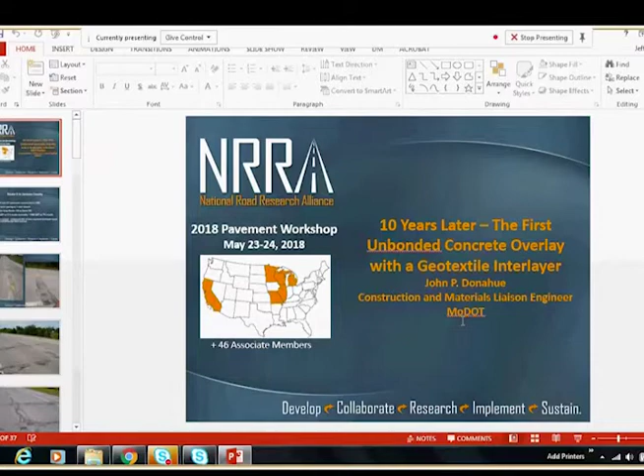John was born ready. All right, very good. We'll just switch the order up then.

Next presenter is John Donahue with Missouri DOT. John is a fellow Illini, but he fled Illinois many years ago and never came back, so he's happy there in Missouri, I guess. His presentation is the 10-year anniversary of the Route D Unbonded Concrete Overlay, oldest U.S. project with Geotextile Interlayer. And I'll comment that we built the 6x6 design on Geotextile just a few years ago in Illinois, sort of based on the success in Missouri. So I'm interested to hear John's presentation.

Okay, Chuck. Is there a clicker to advance, or do I just use this laptop? Okay, that's fine. All righty.

This will be a pretty simple, straightforward presentation. In fact, I did it specifically just for this because Tom was looking for topics, and I thought, what could I do? And I thought, hey, Route D, it's 10 years. Let's do a 10-year anniversary update on it. I just had a few of our technicians go out a couple weeks ago and do survey on it, so this is hot off the press type information.

But anyway, I'll just give you a little background information of why this project was significant. This was what we call a letter route, but letter routes are typically pretty low volume. This was actually a concrete pavement constructed south of Kansas City, kind of a bedroom community type portal, but there was some truck traffic, so it wasn't insignificant in terms of the type of loadings that it experienced.

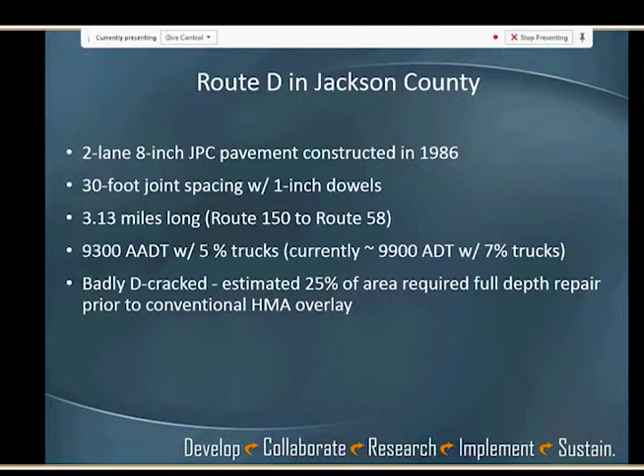I want these pictures to kind of soak in with you a little bit. Some of these you'd have to take a running start to get from one slab to the other. We had a joint presentation years ago with Kansas, and the people from Kansas were like, "We can't believe you guys even had this road open to traffic." So when we toyed with the idea of doing a concrete or specifically big block overlay, I was a little skeptical. I thought that we were really challenging it with the condition of the pavement. There's another one.

You may or may not be familiar with this, but we are big on doing alternate pavement designs. In this case, we actually let the contractor select either a 5-inch concrete overlay or basically a 5 3/4-inch asphalt overlay, which would have been the typical treatment for this. I have to say, though, it was somewhat hardwired. We had a pretty large local contractor in Kansas City that was kind of eager to do this. So we knew with the setup we had that it was probably going to go concrete, so we were pretty optimistic.

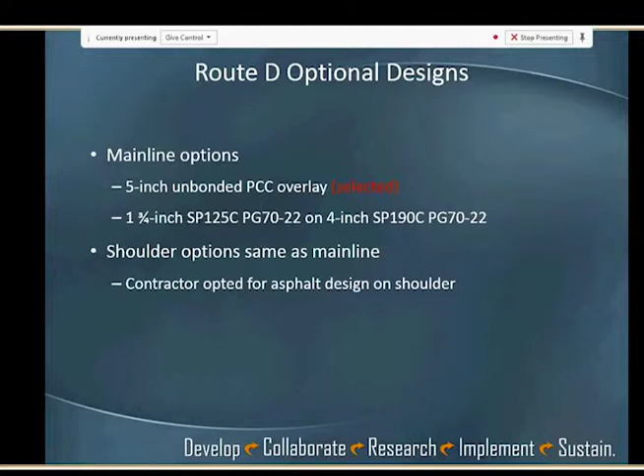And on the shoulders, we'd also given the option of going with either concrete or asphalt. This was the first one of ours. Manik mentioned a slide from our experience with the 4x4 bonded concrete overlays. This was technically one of our first, or really our first significant, what we call big block unbonded overlay.

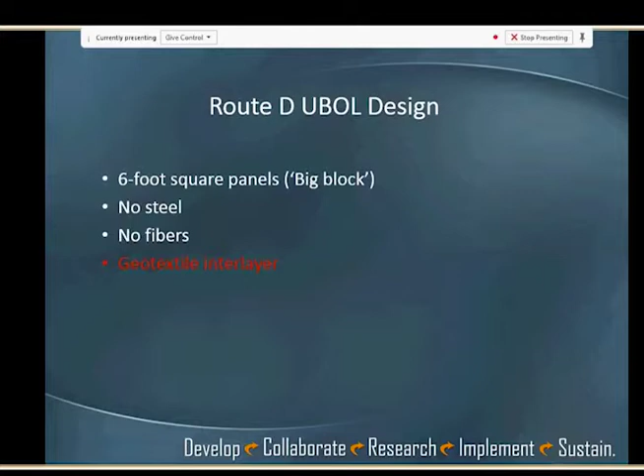And so we're not going to incorporate steel or fibers, but the real significant aspect of this is we were going to try using a geotextile for the interlayer instead of the conventional asphalt interlayer that we've been doing up to that point. Now, just to rehash, and a lot of you know this already, but we'll go over it.

The purpose of the interlayer, and this is an idea that was adopted from Germany, and actually, in a way, you could say this project was not only the first in the country, but maybe the first in the world, because the way the Germans used it, they used it as a separator layer on cement-treated bases. So they weren't even applying this between two concrete pavements. I guess that's a fine point to argue.

The advantages of using this type of geotextile, which was not your Sam's Club weed control fabric, there's a little more to it, was obviously providing the separation that an interlayer should for an unbonded overlay. Also to actually provide drainage. I was kind of skeptical of this, although from some of the data that Minnesota did, it bore out that you really do get some transmissivity of moisture, and you can pull it away from the pavement out towards the shoulder. So there are some specifications for that.

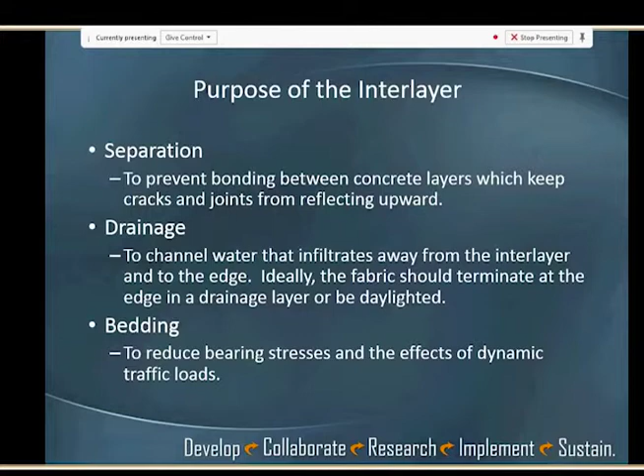And also, because of the thickness of it, probably to some degree mitigating or dissipating some of the horizontal, or possibly even vertical strains from coming up through the overlay. This was the specifications, and we were working with the Transtec Group, George Chang, who you've heard already, works for them, but specifically Sabrina Garber, who speaks and can write German, so she actually translated the German specifications into English, so this was her version of it.

And you can see there is an emphasis on the things you would expect with the fabric, such as tensile strength and elongation, but also you have those spec conditions for the water permeability under different pressures and a few other things as well. And also the weight. At the time, the recommendation was in metric, weight per area, but we converted it to ounces. So in terms of ounces, it was somewhere between 13 and 16 ounces per yard. I think this particular fabric that we had was somewhere in the 15 range.

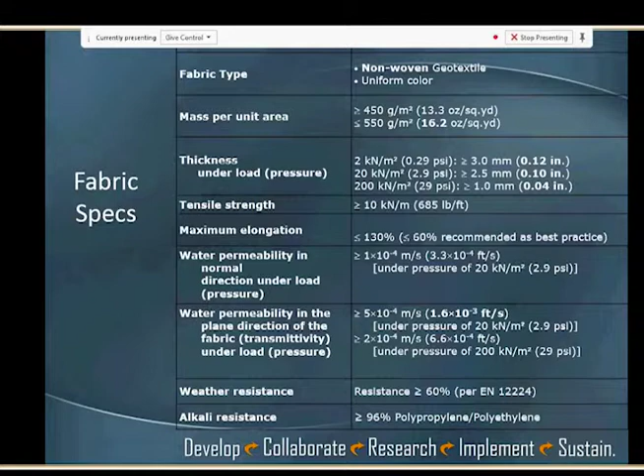And I haven't really followed this closely the last 3 years, but I thought the recommended weights have inched up closer to maybe 20 ounces. I don't know if that's true or not. I thought I'd heard that they're a little bit heftier, but that's what we had at the time. Now, you could see based on the prior condition that we probably needed to do a little bit of prep work to the existing pavement.

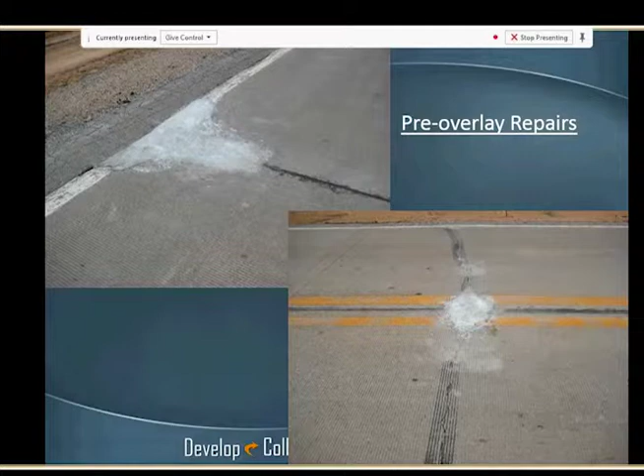We weren't picky. We actually allowed the contractor to use virtually any material. Even if they wanted to use an unbound material, we would have allowed it just so they could have a flush surface to place the fabric on. In this case, the contractor elected to use a grout slurry, which I would suspect was fairly low strength. So while it's better than an unbound material, it's not exactly a permanent fix. So the gist is that we didn't really improve the existing pavement a whole lot. We were just trying to get a flat surface.

And these are some shots from the construction itself. This was new to this contractor, obviously, because we hadn't done this before. I think the standard roll sizes were either about 14 or 15 feet. I don't know if they've shortened those roll lengths, but we basically had some overlap on the center line, and then on the outside shoulder, we pulled that fabric out maybe a couple feet. So that's really where it ended.

And then they put an asphalt shoulder on there. So we didn't really try draining it all the way out to the edge of the shoulder, which probably would have been a better idea, but we just weren't going to invest the money in that much additional fabric.

And some of the conditions to try to look for, obviously, is avoiding wrinkles, cleaning the surface prior to placement, overlapping it, try to overlap it by not more than 8 inches, and then avoid conditions where you actually have three pieces overlapping, so you don't build it up too much.

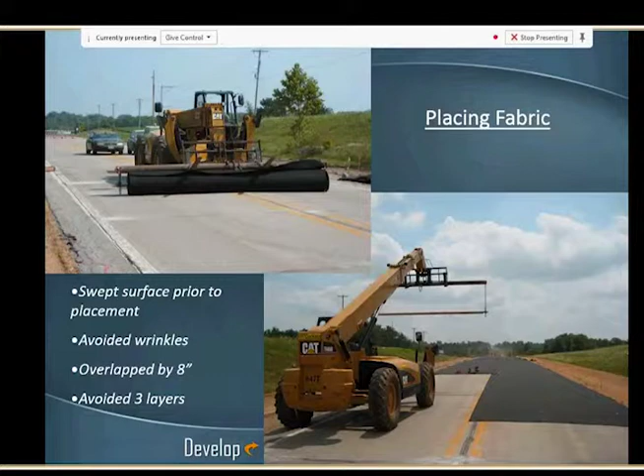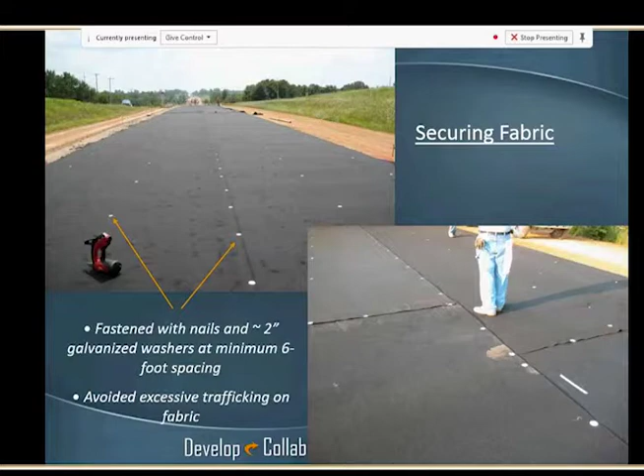Securing the fabric at the time, the only recommendation was to basically use driving it with nails and around a 2-inch size galvanized washer. Since then, I know more recently, although we haven't done it, and I'm glad to hear. I mean, at the time, I thought it'd sure be nice if there was some type of adhesive to use, and that has become the standard practice now. But it was coming up with an adhesive that wasn't going to saturate the fabric and obviously reduce some of its properties. So I guess we have reached that point. So that's an evolution that's for the better with the fabric.

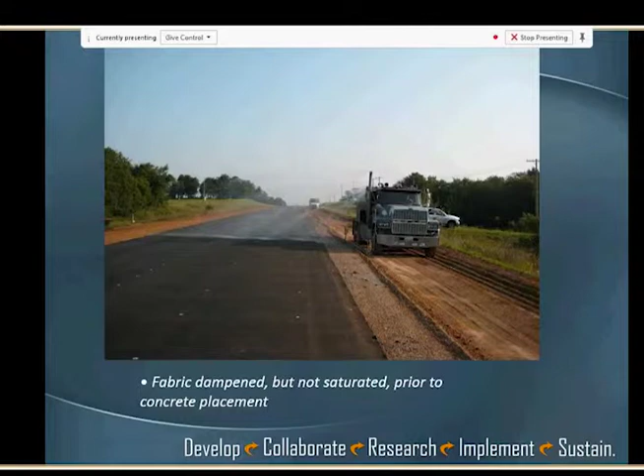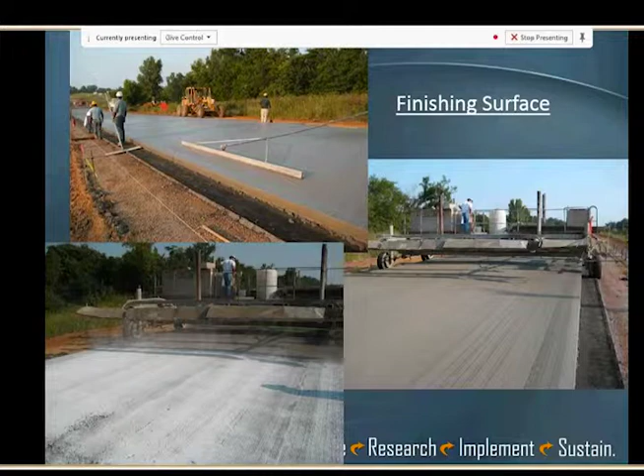And then of course, it is a black surface, so you want to try to reduce the mix temperature to the degree possible, or try to make it uniform and cooling down the surface a little bit. So not saturated. This is just showing the slip-form paver, pulling it through. Just normal bull float finishing, texturing, curing, and that's just a core showing it did bond. I mean, it would come off of the old concrete if you pulled on it, but it did bond pretty well to the new overlay, which makes sense.

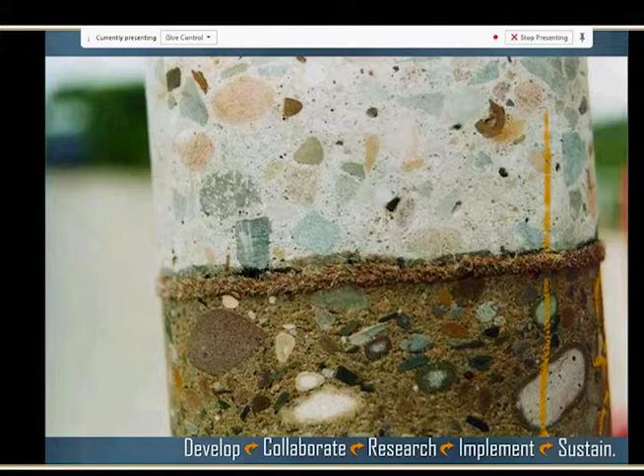And this was the end result after they sawed it into 6x6 panels. And this is a fairly recent picture. I don't know if this is this year or the year before, but okay, now starting here, here's some current pictures of what it looks like. And this is, in the interest of full disclosure, I'm showing you the warts, but it's not as bad as it looked.

My experience on any type of concrete overlay, especially the thinner ones, and there's probably a variety of reasons for why this happens, but most of your problem areas are going to be in the transition zones. And usually once you get a couple 100 feet or so beyond that point, things really get better and they stay consistently good again until you get to the other end. And that's the case here as well.

This is the north end of it. And there was a bit of patching that was going on here. So about the first 600 feet, you do see, it doesn't look like a great success. There was some corner cracking, there were some shattered panels, mid-panel cracks, but most of it, once you get beyond that point, this is what you're seeing.

In the interim, there's a couple other spots where I think primarily because we had drainage issues, and like here you can see this is in a cut section, so it's not too surprising we probably had some water trapped in there, and there's a patch there. And you can see the discoloration on the shoulder. You can see evidence of pumping going on there. In those cases, there's a couple other patches that we had.

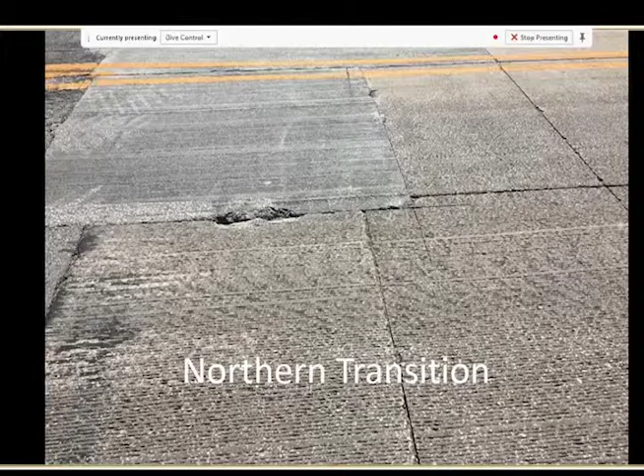It was the same thickness as it was, 5. Oh yeah, I don't know if I even mentioned this. It was basically a 5-inch concrete overlay. The asphalt shoulder was the same thickness too. So roughly 5 inches across. We might have, I think, for estimating purposes in the bid proposal, probably applied a fudge factor of maybe a 1/2 inch average of concrete to account for surface irregularities. I suspect we did. So, but I mean, the design thickness was 5 inches.

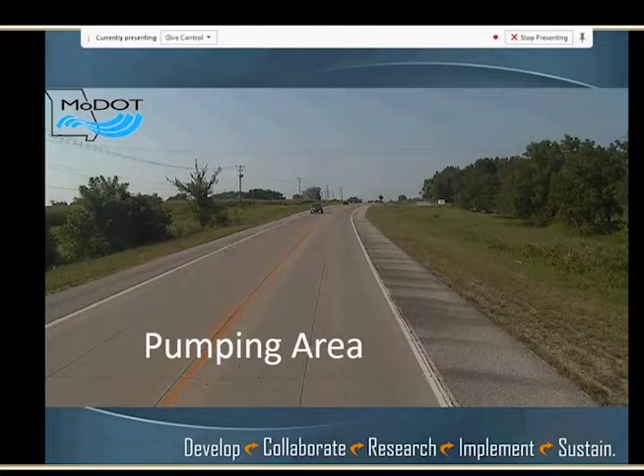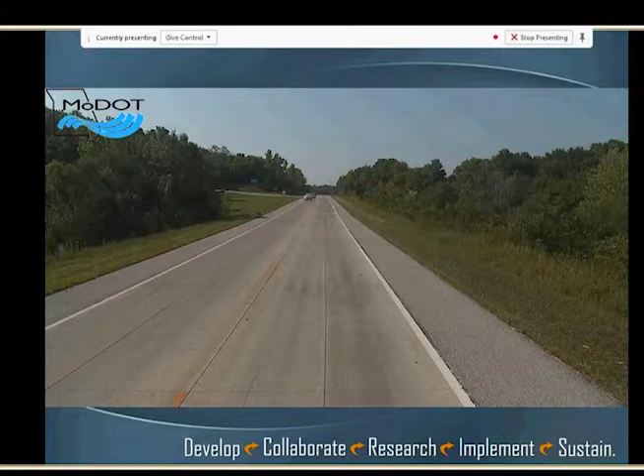But mostly, this is what you see going down the line. I mean, it's just 3 miles of pavement, a little over 3 miles, and yeah, it's good. And like I said, there is truck traffic. I mean, some significant truck traffic. I don't know if that's a grain truck or whatever, but you can tell there's a lot of axles on it. So there are some, I don't know, Brett, do we have, I thought there was a quarry somewhere nearby too down in that area, but might be using that road as well.

Okay, so this is the south end of it. The south end was not as bad really as the north end. In fact, there really wasn't a lot going on here. There were a few cracked panels. It transitioned actually to full-size panels where we went to full depth pavement to tie into the intersection.

But overall, the results of this survey: we looked at over 9,800 panels. Well, I didn't do it, somebody else did it. And out of all those, 192 were cracked or spalled. So that works out to a failure rate of just under 2%.

Now, I did have to make a call looking through the distress sheets. There were some spots with minor spalling. They're relatively small spalls, maybe a couple inches across, not affecting ride performance or anything like that. It's more just an aesthetic deficiency. Maybe that'll lead to something larger in the future. It could, but I felt for the time being that wasn't worth adding.

If I had included those, it probably would have added another 1% to this. So if you really want to be conservative, you could say there is about a 3% failure rate, or let's say distress rate, because I wouldn't call all those panels failed. So 3% after 10 years, I consider that a success.

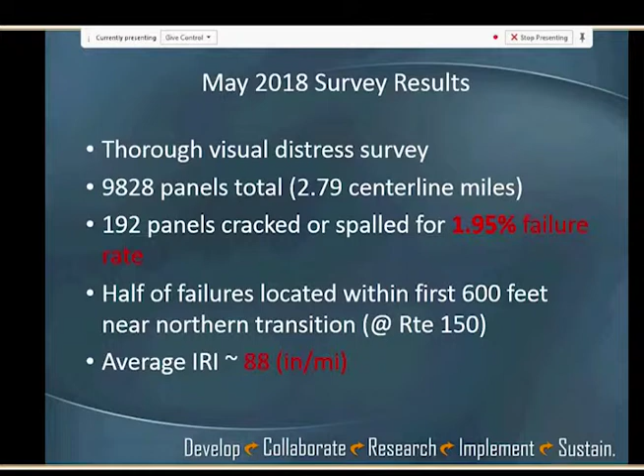I guess the findings, again, overall performance, can't complain. And considering the initial condition, I honestly didn't expect it to be this good after 10 years. Remember what it looked like prior to placing this overlay. Just reiterating, usually the transition areas are prone to higher failure rates.

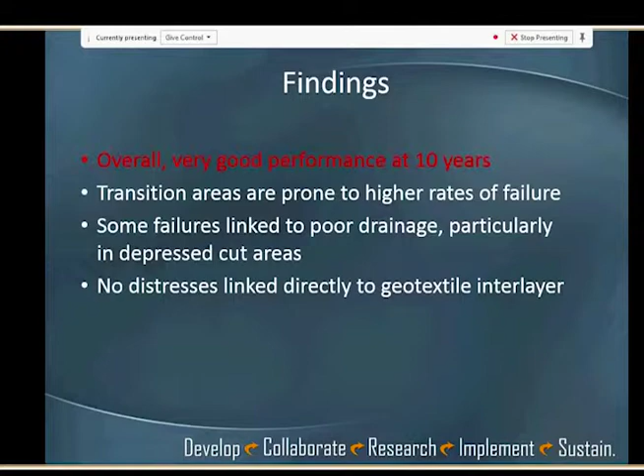Drainage definitely played a role in some of the cracked slabs and failures that we saw, and I really can't say there's any distress that was linked directly to the interlayer. I can definitely link distresses in unbonded overlays to the asphalt interlayer that completely disappeared at some point in time, decided to leave the pavement system. But so far, our experience with geotextiles has been pretty positive. So anyway, that's my very basic, simple update on Route D.

Any questions? Tim? Do you know what the initial IRI was of this project? No, I don't. I can only imagine. No, I mean after it was paved. Oh, right after it was paved. Trying to remember. I think it was in the high 60s, 70s, somewhere in that area. So really, compared to nowadays, not really that smooth.

What you're rating so far has been pretty flat. Right, exactly, you're right. What we rate as a good pavement, our criteria for acceptable pavements, is basically dumbed down to whether it's below or above 100. So technically, this would be considered a good pavement by Missouri standards.

You might mention to him, John, because of the issues with the asphalt stripping out and causing problems, we switched over. Yeah, we allow the industry to switch automatically to geotextile to avoid that issue. Yeah, it's cheaper. If we give you a choice, why would you not use the geotextile? But it's getting to the point where I would just about mandate the geotextile because of the problems we've had with the asphalt interlayers.

So, all right, thank you. Try this one more time.